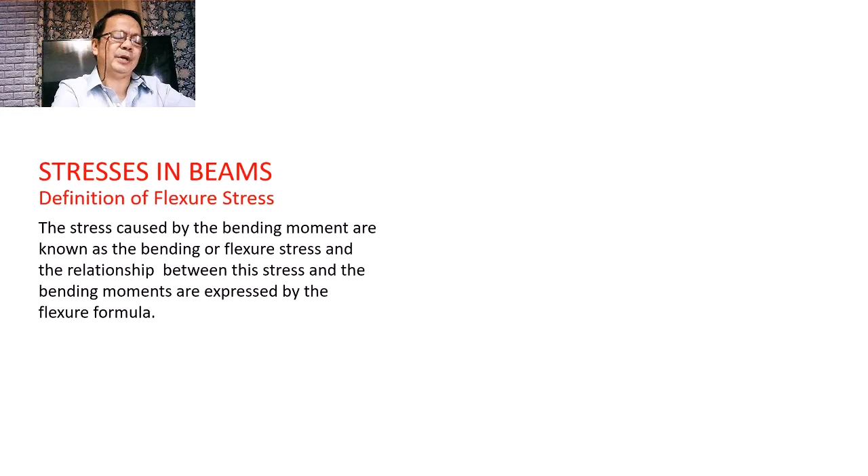Pag sinabi nating stresses in beams, these are the stresses that are caused by bending moments, sometimes also called flexure stress. The relationship between this stress and the bending moments is expressed in terms of the flexure formula. Ang ating magiging paraan ng discussions ngayon ay ipakita natin kung paano ang derivation ng stress formula, and from there we shall show an example of how to use the stress formula in dealing with beams that are subjected to bending moments. So let us have here our derivation of flexure formula.

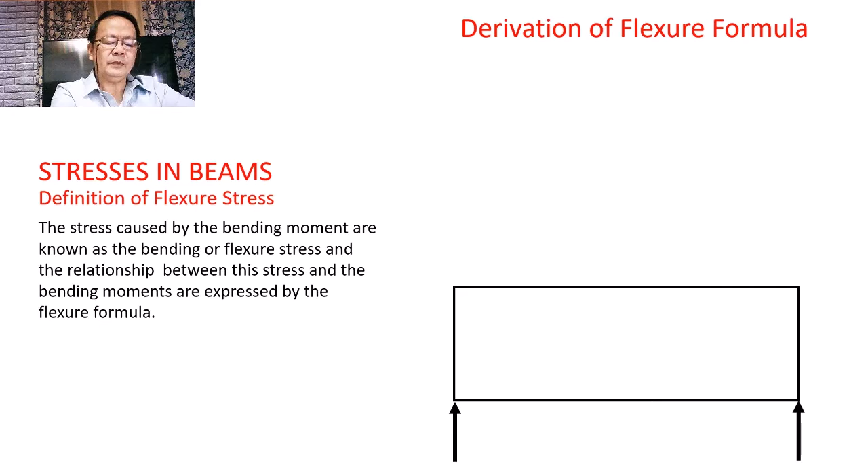Let's start with a simple beam that is simply supported or supported at the ends by a hinge and a roller. Imagine that on the beam we consider two adjacent sections AB and CD. The two sections are very close to each other, and the distance that separates them shall be treated as dx. Imagine that this beam is subjected to a concentrated load P. Hence, due to this concentrated load P, the beam will be subjected to bending.

And most probably, with exaggeration, this is what will happen to the beam after it has been subjected to the bending load. So here is what will happen: the beam will concave in this manner. And because of this concavity, the beam will be subjected to what we call flexure stress.

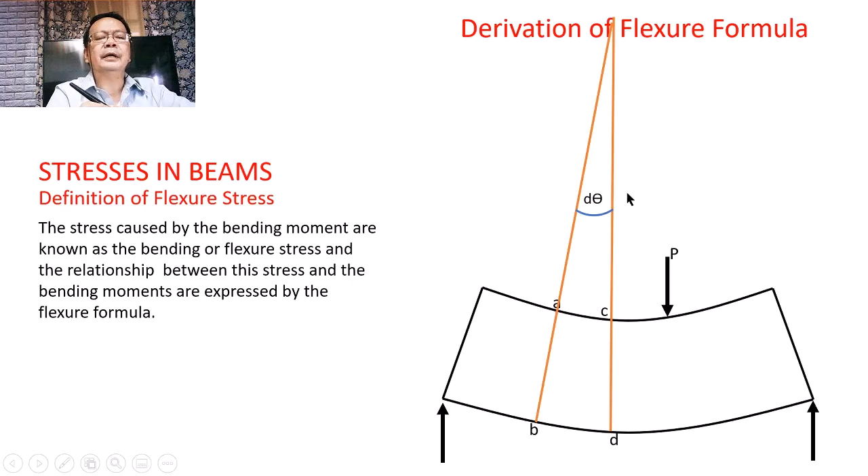Mapapansin natin that after the beam has concaved, the section AB and section CD rotated with respect to each other by an angle that is very small. We consider this angle to be d theta. Due to the rotation of AB and CD with respect to each other, the following can be observed.

The fiber AC on top of the beam is shortened. There is shortening on AC, and by the principle that we have learned, we will expect that this fiber is subjected to compression. While this fiber at the bottom of the beam, BD, is lengthened, and therefore we would expect that BD is subjected to tension because of the elongation of the fiber.

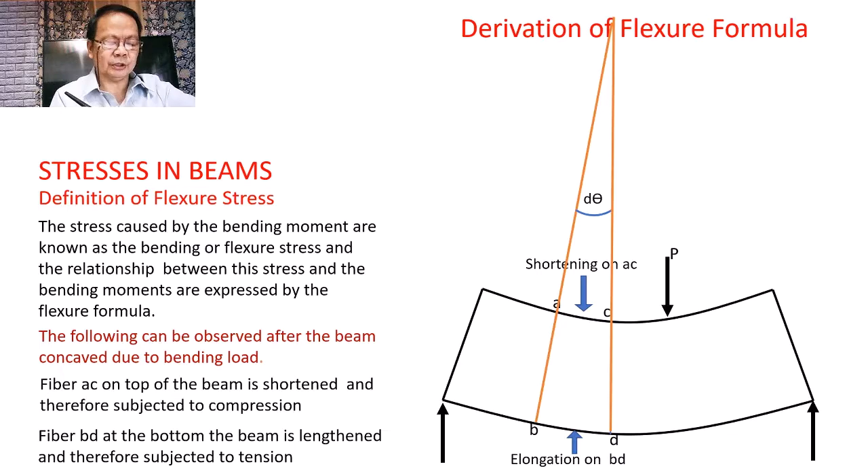And you will find that somewhere between AC and BD, there is a fiber EF. That is not changed in dimension - the dimension remains unchanged, and therefore we would expect that EF is not subjected to stress, or stress in that particular fiber is equal to 0.

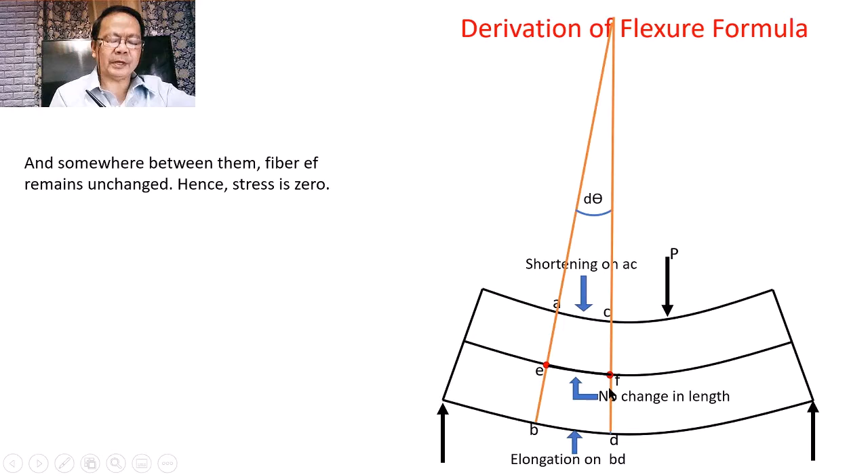And the section that contains this fiber EF that remains unchanged is what we call the neutral surface of the beam. We call this the neutral surface because such surface contains the fibers that are unchanged, and therefore they carry no load. This neutral surface is the dividing section of the beam, so that the upper portion of the beam is either subjected to tension or compression, while the lower portion of the beam is subjected to the opposite.

Stress, and from which the radius of curvature is also measured, and normally the radius of curvature is given by the symbol rho.

Now, if you are to draw line C prime D prime, which is parallel to AB - here is our AB, and imagine that we will be drawing a line that is parallel to this AB passing through F - you will find the following.

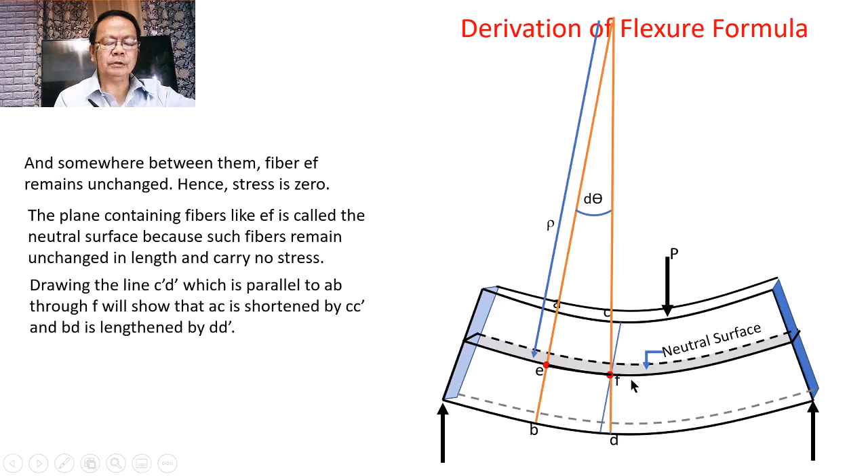If this will be the line that will be drawn, and imagine that this is our C prime D prime, we will see that this fiber AC is shortened by the amount C prime C, while the fiber BD is elongated by an amount D prime D. And the angle that this C prime D prime is making with respect to CD is also the same as the angle of rotation between AB and CD - that angle will also be this angle, d theta.

Now, let us imagine that we consider a typical fiber GH somewhere at a distance y from the neutral surface. Then we would expect that this fiber GH will have a deformation HK, the one shown in blue. And this deformation HK can be expressed by the relation between its position from the neutral surface, y, and the angle d theta that is subtended by that deformation.

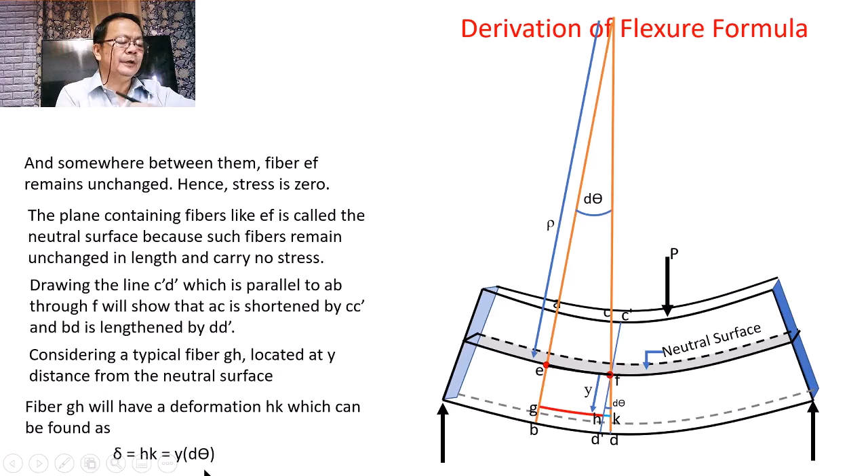This arc length HK, which is the deformation of the fiber GH, shall be equal to the product of y multiplied by d theta, where d theta is expressed in radians.

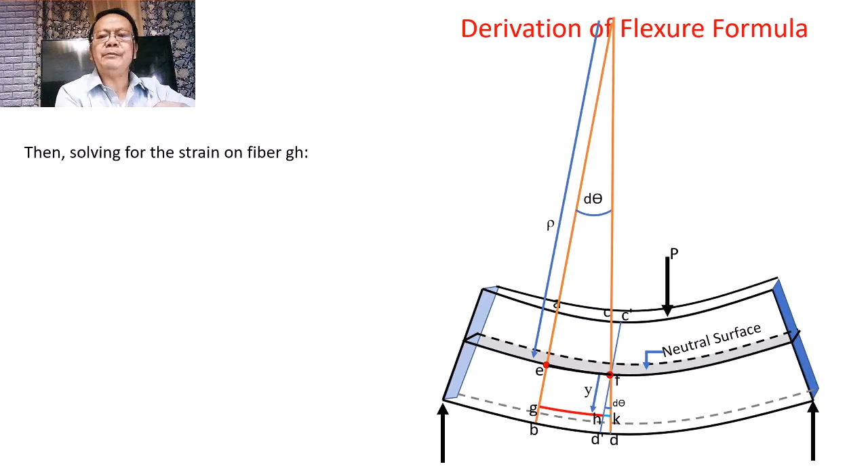Now we're to solve for the strain on the fiber GH. The strain being defined as the ratio of the deformation to the original length. Having shown that deformation is equal to the product of y multiplied by d theta for this fiber GH, therefore the strain shall be equal to the product of y multiplied by d theta divided by GH.

But GH is equal to EF, as shown in this illustration. EF is equal to, or can be computed as, the arc length that subtends an angle d theta on a radius equal to rho. Therefore EF will be equal to rho multiplied by d theta.

So if rho multiplied by d theta is substituted for GH in this strain formula, our strain will be equal to the ratio of the deformation over the original length, equal to y multiplied by d theta over rho multiplied by d theta. The d theta terms cancel each other, and what remains is the strain equal to the ratio of the distance y over the radius of curvature rho.

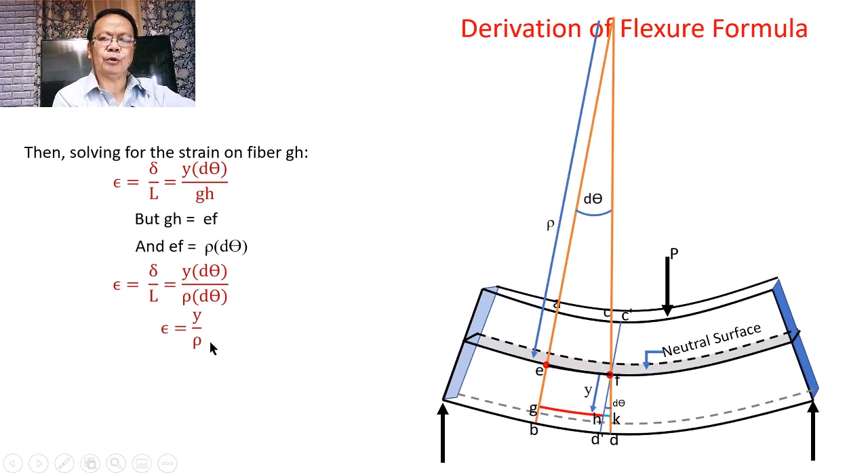Now if the beam is assumed to be homogeneous and obeys Hooke's law, which says that within the proportional limit the stress is directly proportional to the strain, therefore we would say that the stress shall be equal to the product of the proportionality constant, which is the modulus of elasticity, multiplied by strain.

And if strain is substituted with its value equal to y over rho, therefore the formula for stress will become equal to E multiplied by the quantity y over rho.

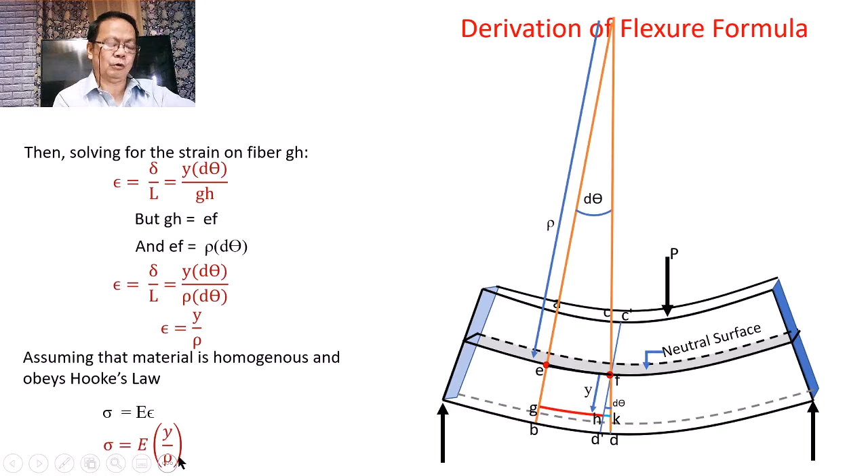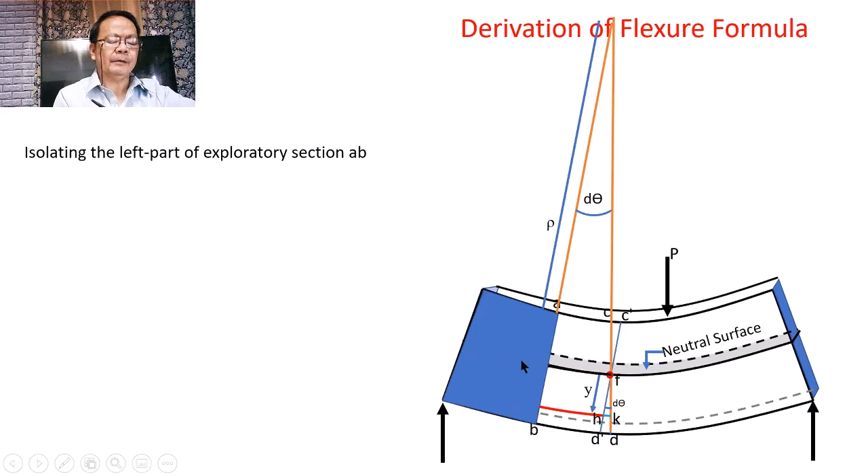Now let us consider isolating the left part of the exploratory section AB. Here is our AB, and let us imagine that this part, which I have given emphasis or marked, shall be isolated as a free body diagram. Let us try to isolate it here, and here is our isolated view of the segment, the left part of the exploratory section AB.

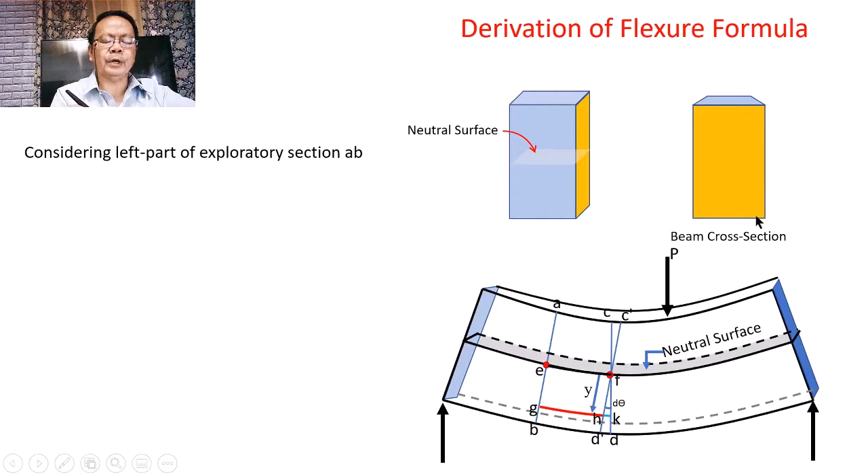Here is our neutral surface, and this part shall be our beam cross-section representing this side. Imagine that the beam cross-section is drawn here, so we have our beam cross-section, and its width will be equal to this width. The intersection of the neutral surface and the cross-section of the beam shall be called the neutral axis. In this section view, the neutral axis is the line drawn horizontally in this direction.

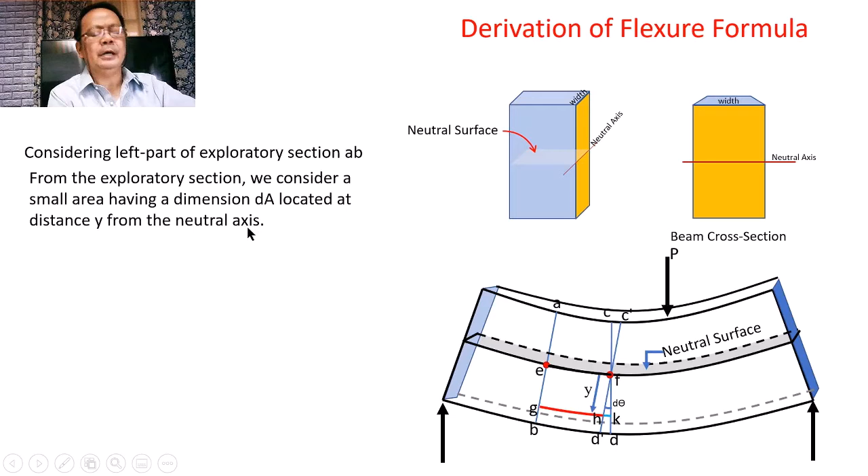Now let us imagine that on this isolated view of the beam, we consider a differential area dA, a small area having a dimension dA, located at a distance y from the neutral axis.

Because of the bending, as reflected by the elongation HK, we would expect that the lower portion of this beam is subjected to a tensile stress. Hence this differential area will be subjected to a differential force dF, which is very, very small, as it is acting over a very, very small differential area. The magnitude of this differential force will be equal to the product of the stress multiplied by that differential area.

So if we consider the moment resistance, or moment capacity, of this differential area, it will be equal to the product of y multiplied by that differential force. From here, we can find the resisting moment about the neutral axis of that differential area, located at distance y from the neutral axis, being subjected to a differential force dF, whose magnitude is equal to stress multiplied by the differential area.

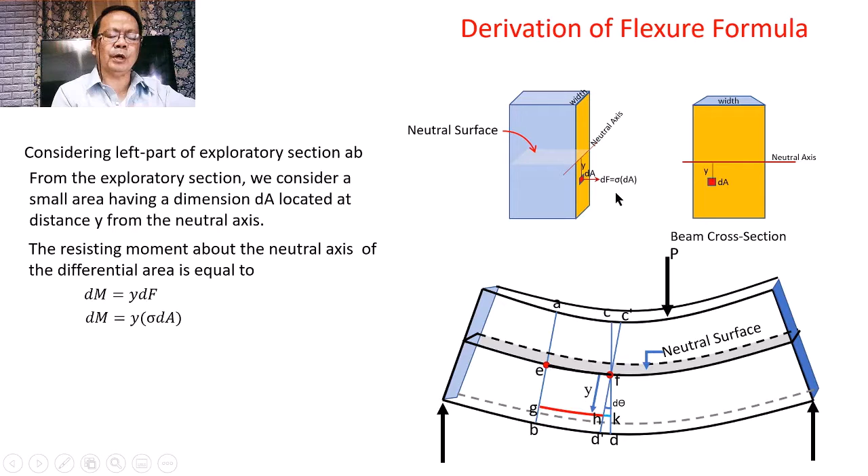This would offer a resisting moment equal to the product of y multiplied by that differential force, and that resisting moment is also very, very small, because the area is so small. But if we substitute the value of the differential force, which is equal to the stress multiplied by dA, into this formula, our dM shall be equal to y multiplied by the stress multiplied by dA.

Now, if we are to consider the total resistance of the entire section, the total resisting moment about the neutral axis of the entire area must be equal to the total moment acting at that section, and is the sum of the resisting moments of each differential area. Adding all the differential moments that each differential area can offer gives the total resisting moment of the entire area, which in design must equal the actual bending moment acting at that section.

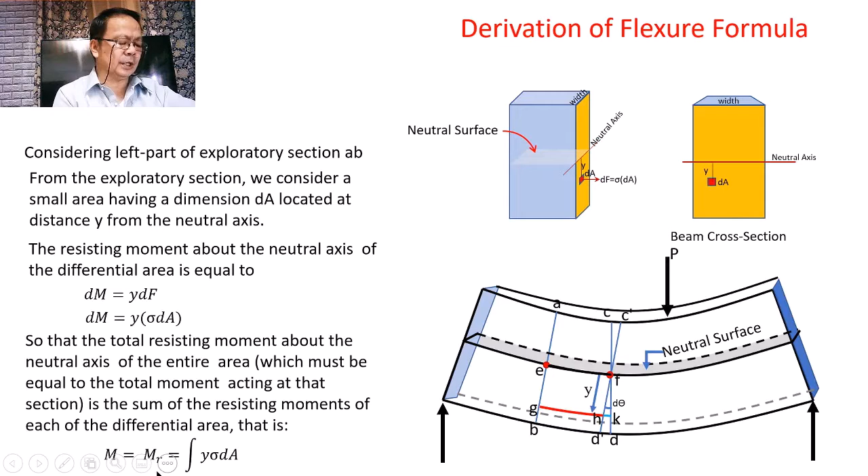Hence, we say that the moment, which is equal to the resisting moment, is equal to the integral of y multiplied by the stress multiplied by the differential area.

However, a while ago we expressed that this stress is equal to the modulus of elasticity multiplied by the strain. If strain is substituted by y over rho, then stress equals E multiplied by y over rho.

Now, if this stress is substituted in this formula, the moment becomes the integral of y multiplied by the quantity E multiplied by y over rho, multiplied by dA. Rearranging and placing the constants E and rho out of the integral sign, the moment becomes E over rho multiplied by the integral of y squared multiplied by dA.

I would like you to take a look at this term. The term represented by the integral of y squared dA represents the moment of inertia of the section of the beam with respect to the neutral axis, normally denoted with the symbol I.

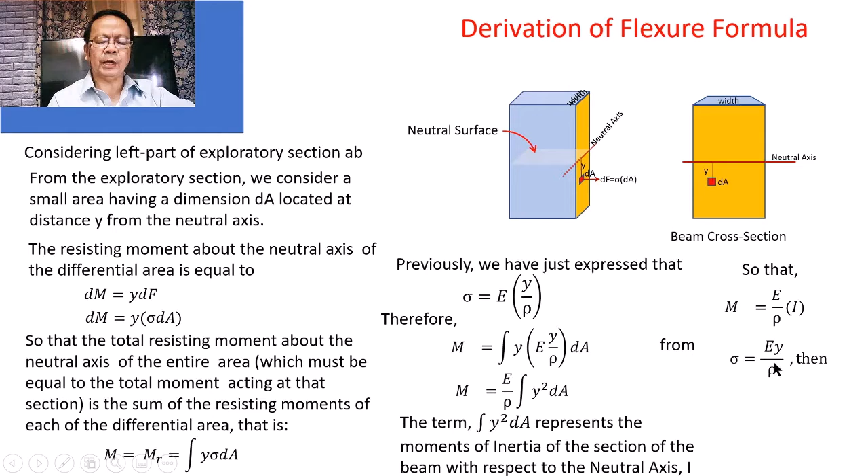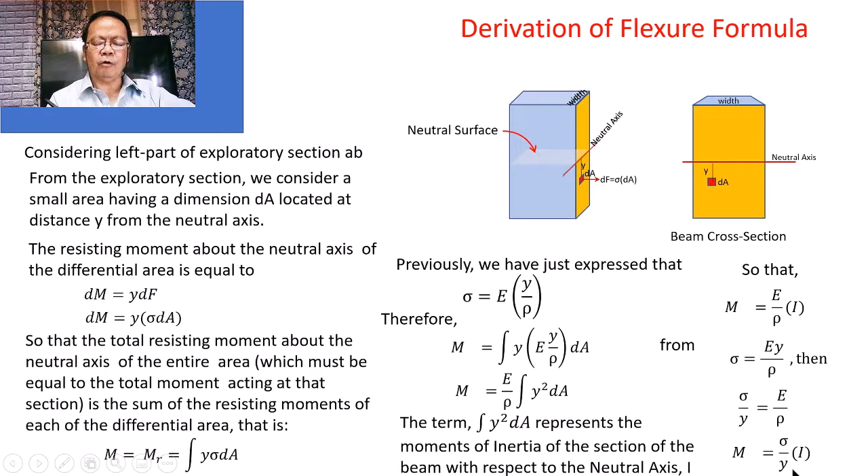But a while ago we showed that stress is equal to the product of E multiplied by y over rho. If this equation is divided by y, we get stress over y equal to E over rho. Now, substituting this E over rho, which equals stress over y, into the formula, our moment becomes equal to stress over y multiplied by I.

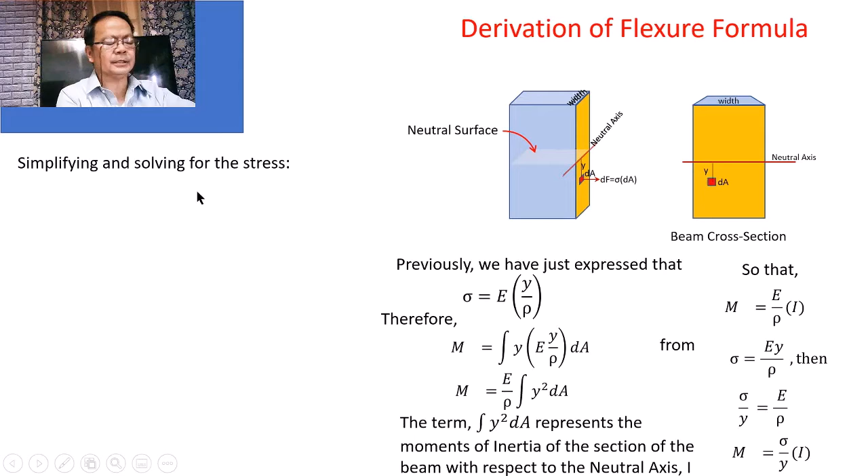If this is rearranged, simplified, and solved for the stress, we get stress equal to My over I. This is the relationship that shows the formula relating the stress, the bending moment, and the location of the fiber where the stress is being computed.

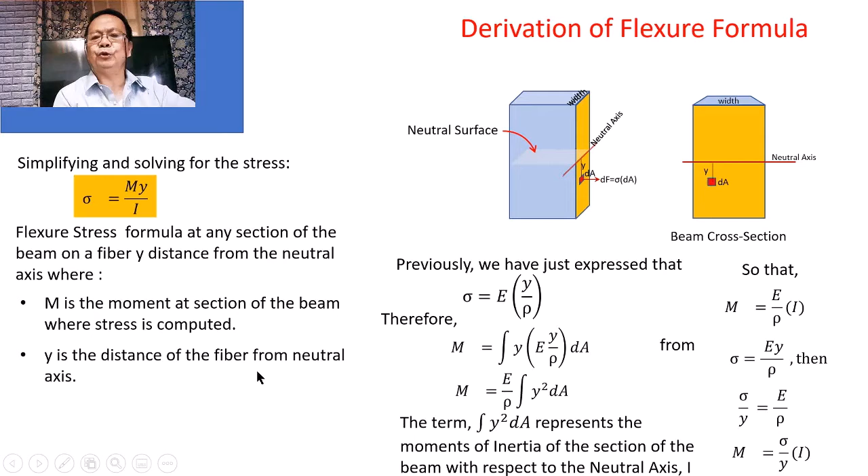From this stress formula, which we call the flexure formula, the stress at any section of the beam on a fiber located y distance from the neutral axis is given. Here, M is the moment at the section of the beam where the stress is computed, y is the distance of the fiber from the neutral axis of the beam cross-section, and I is the moment of inertia of the beam cross-section with respect to the neutral axis.

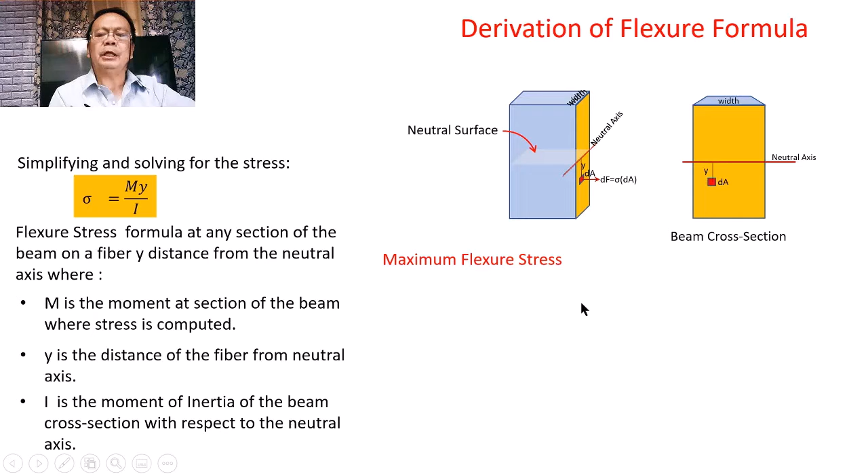Now, for the maximum flexure stress, we say that the maximum flexure stress on a beam occurs at the section where the moment is maximum and at the fiber farthest from the neutral axis. Meaning, we can expect the maximum stress to occur at the section of the beam where the moment is maximum and at the position farthest from the neutral axis of the beam.

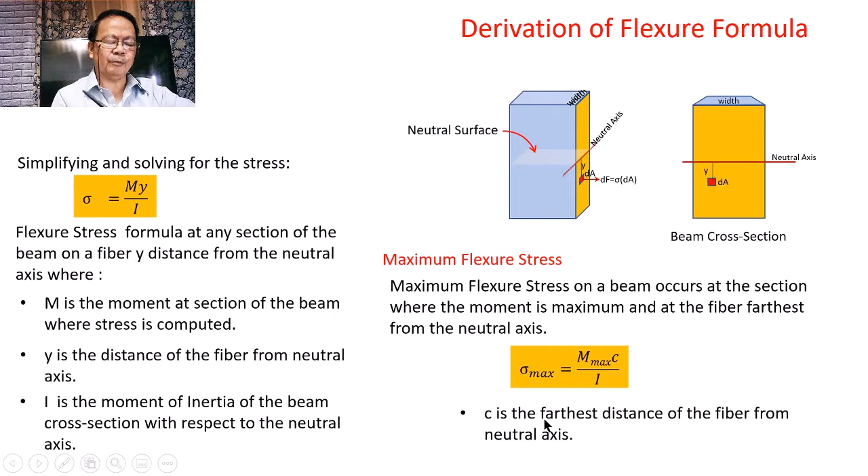Hence, for the formula for the maximum flexure stress, substituting the maximum moment for M and c for the maximum value of y, the stress can be written as Mc over I, where c is the farthest distance of the fiber from the neutral axis.

Now let us consider a beam that is rectangular in cross-section, having a width equal to b and a depth equal to d. So we shall have here our beam cross-section, with the width here and the depth defined by this distance. The neutral axis of the beam is located at distance d over 2 from the top, or d over 2 from the bottom.

For this rectangular beam cross-section, the moment of inertia of the beam with respect to the neutral axis is equal to bd cubed over 12. If this is substituted into the stress formula, we can find the maximum stress of the rectangular beam to be the maximum moment multiplied by c, which is equal to d over 2, divided by the moment of inertia, bd cubed over 12.

In this relationship, d will cancel, and 2 will cancel with 12, becoming 6. So we shall have the stress formula for the maximum stress in a rectangular beam equal to 6M over bd squared. That gives us our stress formula.

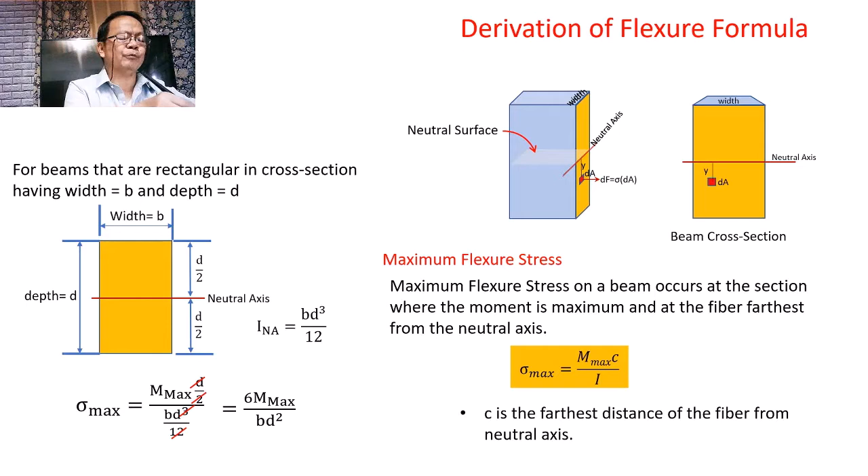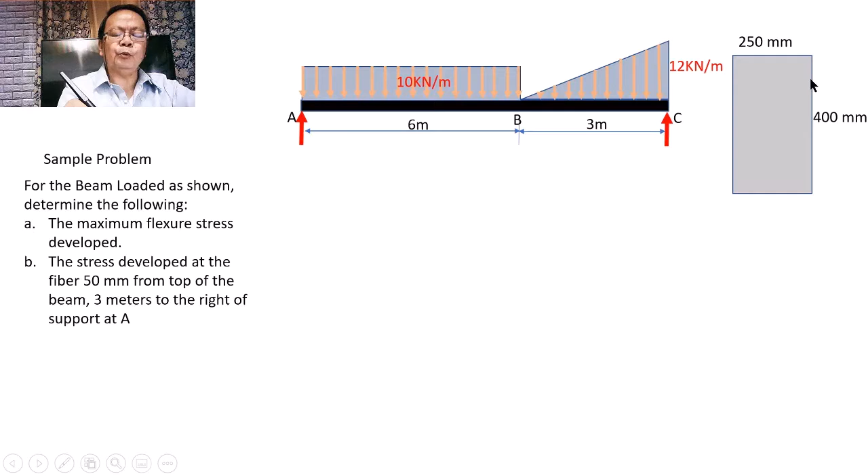We are asked to solve for the maximum flexure stress and the stress developed at the section 3 meters to the right of the support, 50 millimeters from top, meaning we are finding the moment at this particular section of the beam, 3 meters along and at a certain distance of 50 millimeters from the top. So how do we solve this problem?

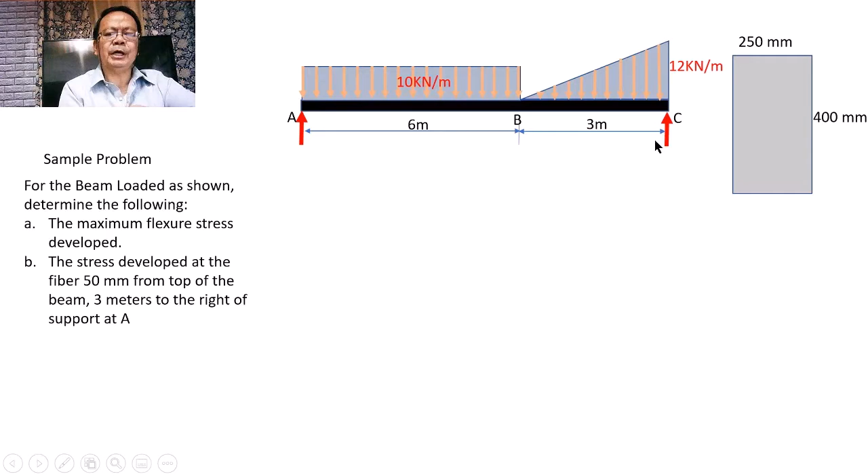Since we are looking for the maximum stress, we need to find the maximum bending moment. It is good to first solve for the magnitude of the reactions at the supports, and from there draw the shear and moment diagrams. Let's start with solving for the reactions at the support.

We can start by solving for the reaction at A by taking moments at C. When we sum up moments at C equal to 0, considering counterclockwise moment as positive, we can solve for A.

Because the beam is subjected to a uniformly distributed load and a uniformly varying load, we need to identify the magnitude of those distributed loads. For the uniformly varying load, the resultant of this triangular loading is located at a point with magnitude equal to 1/2 of 3 multiplied by 12, acting at a distance of 1 meter from the right support.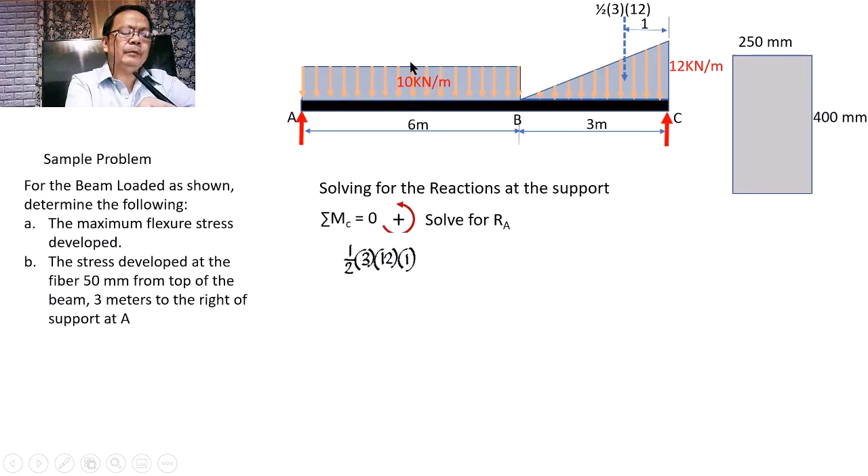From here we apply our moment equation: 1/2 of 3 multiplied by 12 multiplied by 1, as the moment at C, while the other load has a resultant equal to 10 multiplied by 6, with a distance from the right support equal to 6. Adding these, plus 6 multiplied by 6, minus RA multiplied by 9, equals 0. From here we can solve for RA equal to 42.

After solving for RA, we can solve for R sub C by summing moments about RA. When we sum up moments about RA equal to 0, considering the same direction convention, clockwise and counterclockwise as positive, we can solve for R sub C.

We solve for the counterclockwise moment due to R sub C, giving R sub C multiplied by 9. The resultant of this rectangular load has a distance of 3 from A, so we have minus 10 multiplied by 6 multiplied by 3.

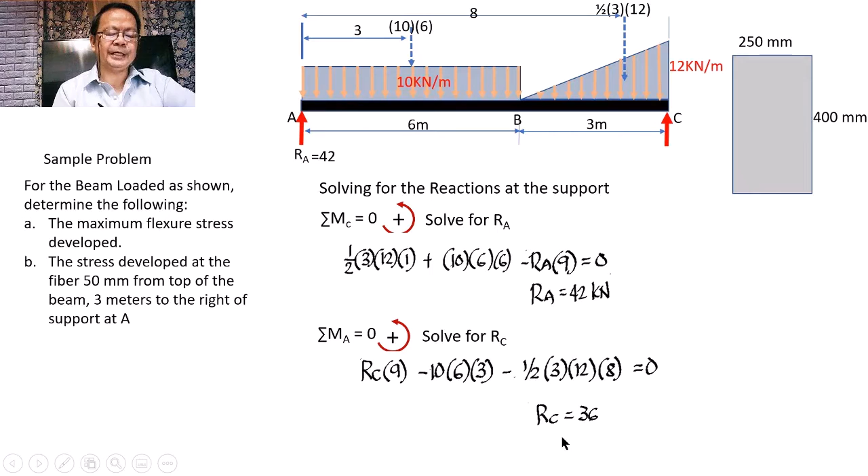This other load has a moment arm of 8 from A, giving us minus 1/2 of 3 multiplied by 12 multiplied by 8, equal to 0. From here we can solve for R sub C equal to 36.

After solving for the reactions at the supports, we can now draw the shear and moment diagrams. Let's start with the shear diagram, finding the shear at every change of load position, at points A, B, and C.

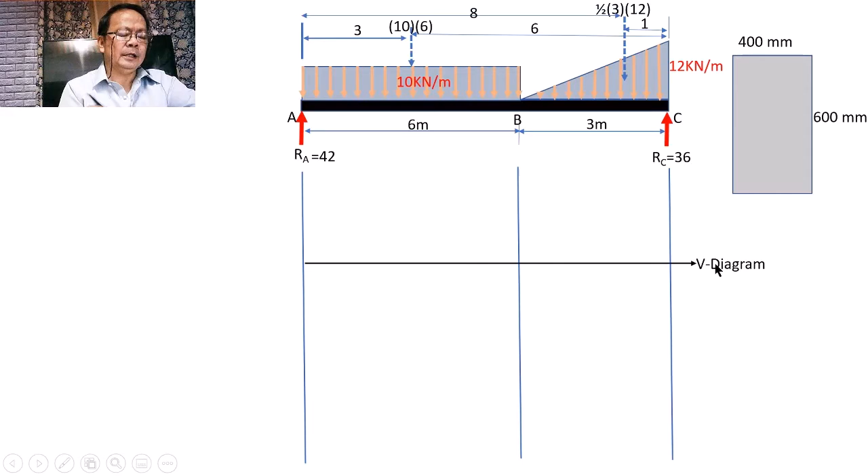Let us consider our controlling points A, B, and C. If we are to solve for the shear by this relation, we would expect that the shear at the left of A shall start at 0.

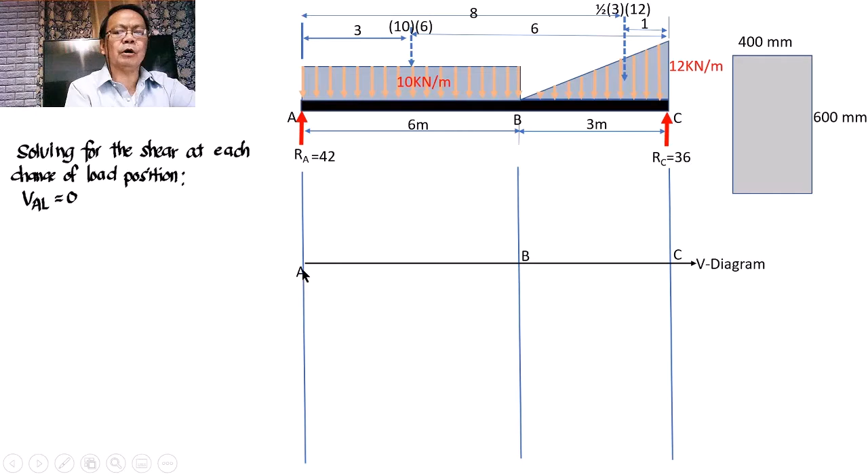So we have here 0. Therefore, the shear at the right of A will be equal to this concentrated load plus the concentrated load at A, which is equal to 42. So when this is substituted, we have 0 plus 42. Therefore, the shear at the right of A will be equal to 42. And this 42 will be somewhere here.

Therefore, this will be connected by a line that is directed upward, representing this concentrated load upward at A. Then next we have to compute for the shear at B.

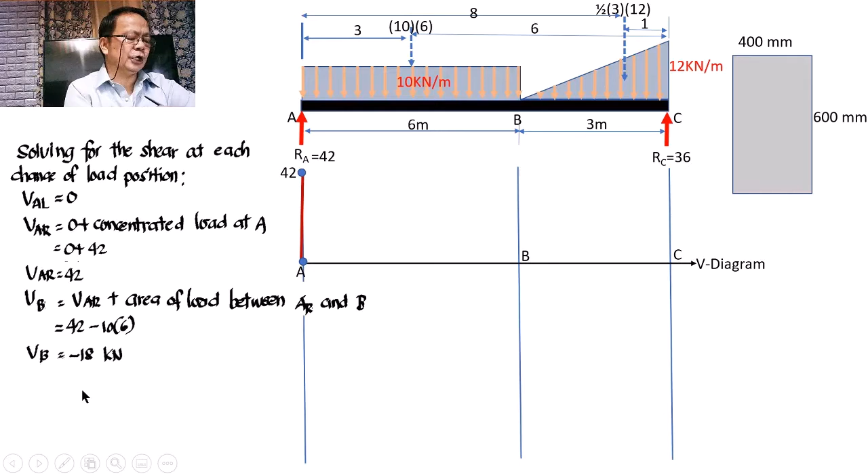The shear at B will be the shear at the right of A plus the area of the load between the right of A and point B. In the illustration, the load between A right and B is a rectangle having a magnitude of 10 multiplied by 6. Therefore, if this is substituted, we have 42 minus 10 multiplied by 6, and the shear at B will be negative 18.

And negative 18 could be somewhere here. This will now be connected by a straight line because we have a horizontal load representing degree equal to 0. Since the degree of curvature of the shear diagram is always 1 degree higher than the degree of curvature of the load diagram, we expect that the shear diagram between A and B would have a degree equal to 1, which represents a straight line. Therefore, 42 and negative 18 here can now be connected with a straight line that runs in this direction.

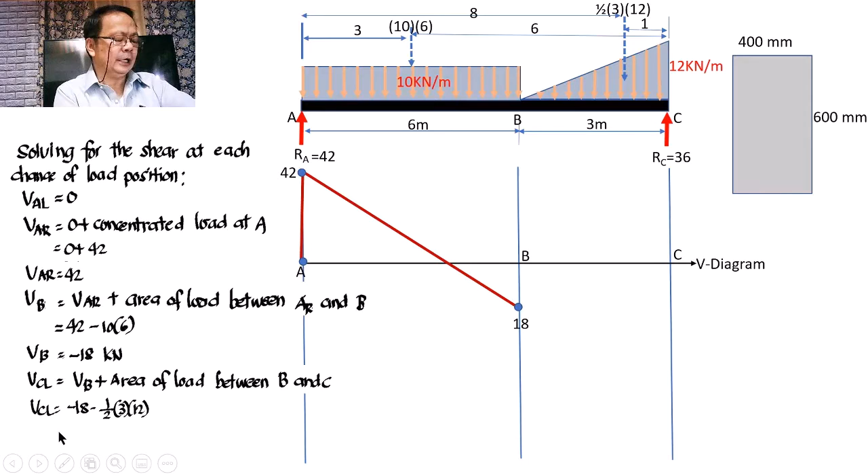Then afterwards, we can now compute for the shear at the left of C. The shear at the left of C will be equal to the shear at B plus the area of the load between B and C. The area of the load between B and C is triangular, having a base of 3 and a height equal to 12. So if this is substituted here, the shear at the left of C will be negative 18 minus 1/2 of 3 multiplied by 12, and this gives us a value of negative 36.

So somewhere here we have a value of negative 36, and we can connect the two points, negative 18 and negative 36, with a curve that is a second degree curve because the load is uniformly varying, representing a first degree curve. Therefore, it will be connected with a second degree curve that runs in this direction.

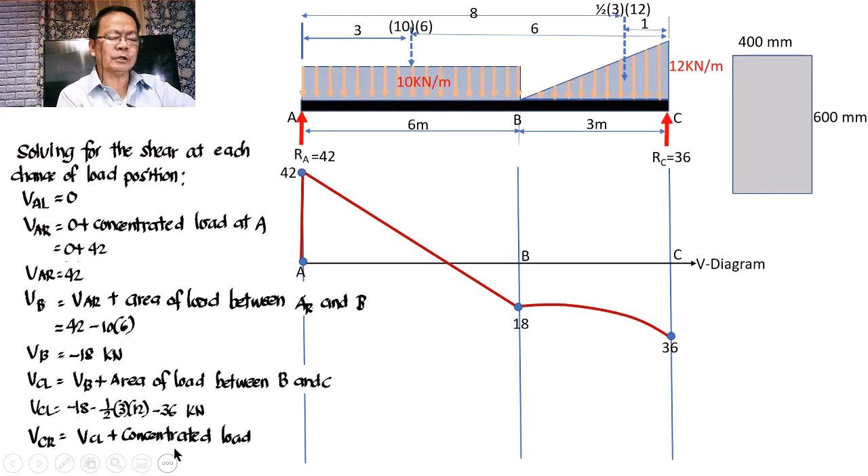And therefore, finally, the shear at the right of C will be equal to the shear at the left of C plus the concentrated load at C, and that gives us a value equal to 0. And this now becomes our shape of the shear diagram.

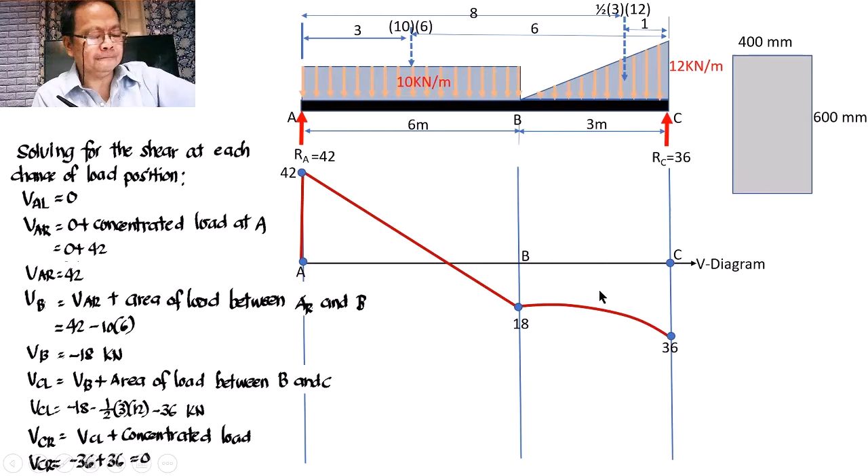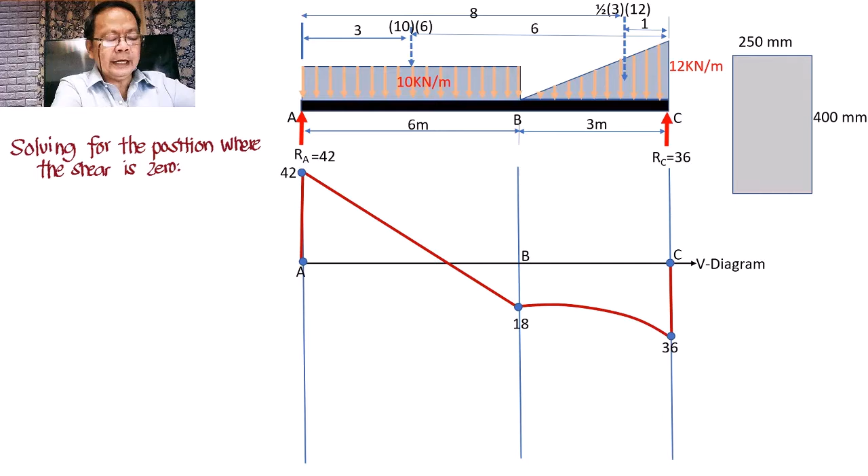Now, after we have drawn the shape of the shear diagram, we can now compute for the position where the shear is 0, because we expect that the moment will be maximum at the point where the shear is 0. And we will notice on the diagram that we have seen this point where the shear is 0. Therefore, we have to consider where this position is, either from A or from B.

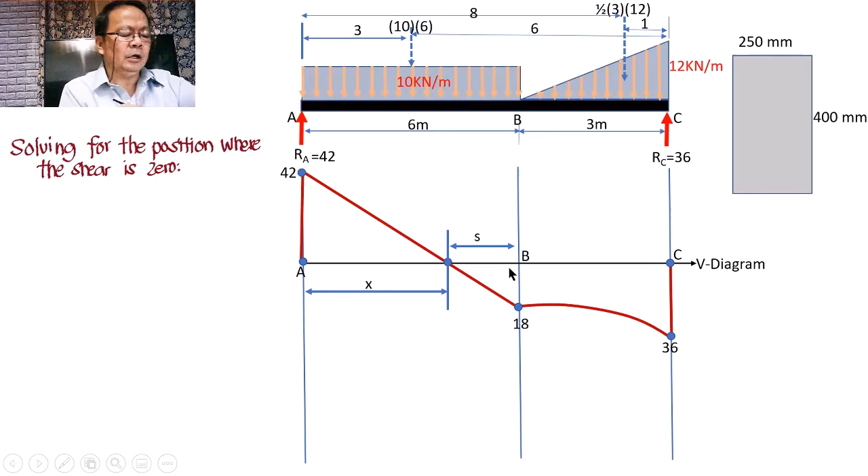Let us imagine that this distance be measured as x from A, or s from B. Therefore, you would find that there will be two similar triangles. So from the similar triangles, we can solve for s and x by using ratio and proportion. So using ratio and proportion, how do we express the ratio and proportion?

I will have here 42 is to x, the vertical is to the horizontal, as 18 is to s. But we expect that we are going to look at the relationship between x and s, because the sum of the two is equal to 6, therefore s will be equal to 6 minus x. And if this s that is equal to 6 minus x is substituted here, then we can find that 42 over x is equal to 18 over 6 minus x.

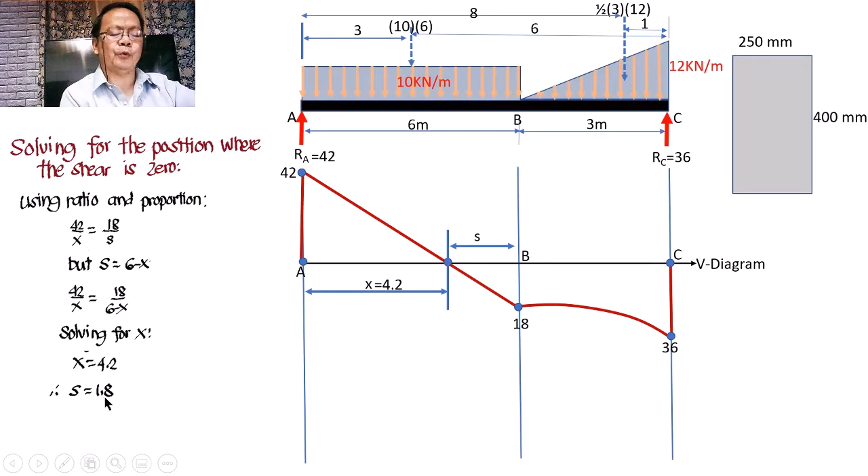And so from here we can solve for x, and we find that x is equal to 4.2. With x equal to 4.2, then s will be equal to 1.8. And so you can find that this one will be equal to 1.8.

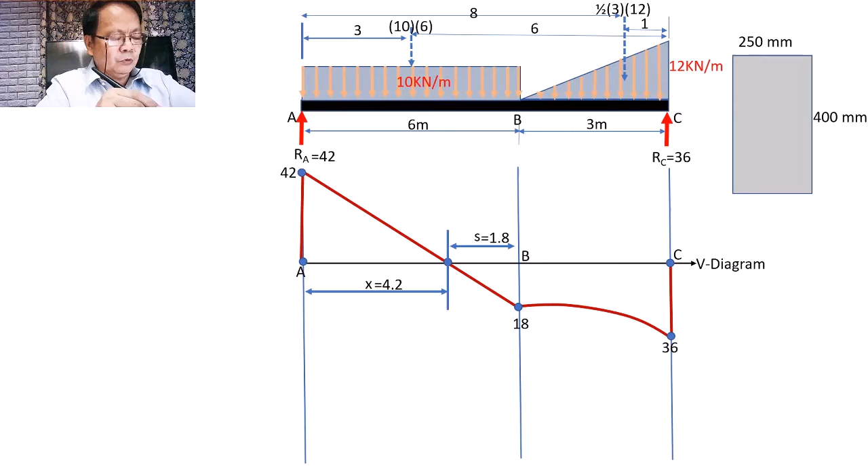Let us now draw the moment diagram from the shear diagram we computed. In drawing the moment diagram, let us give emphasis to the magnitude of the maximum value and the moment at the section 3 meters to the right of A, because these are the moments we will be using in solving the questions. For part 1, we shall work on the maximum stress, so we need the maximum value of the moment.

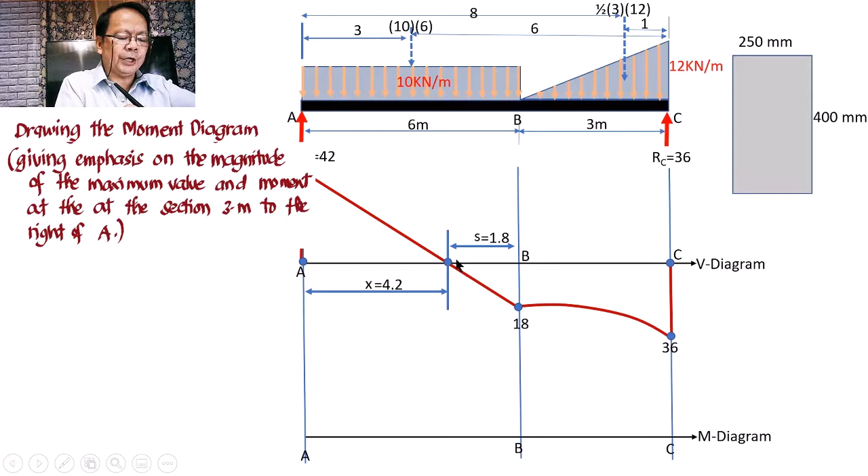While for the second part, we are considering the stress at a particular section, 3 meters to the right of A, so we shall solve for the moment at that section. Let us now start our moment diagram here. Let us consider the change of load positions at points A, B, and C, and since we have an additional point, let us call it D. On the moment diagram, it's important to consider these points in the computation.

So our moment at A will be 0. We consider this as our moment at A.

The next point we shall work on is the moment at point D. The moment at D will be equal to the moment at A plus the area of the shear diagram from A to D. This area is in the form of a triangle having a base equal to 4.2 and a height equal to 42. Therefore, the moment at D will be 0 plus one half of 4.2 times 42, giving us a value of 88.2 kilonewton meter, which we plot here.

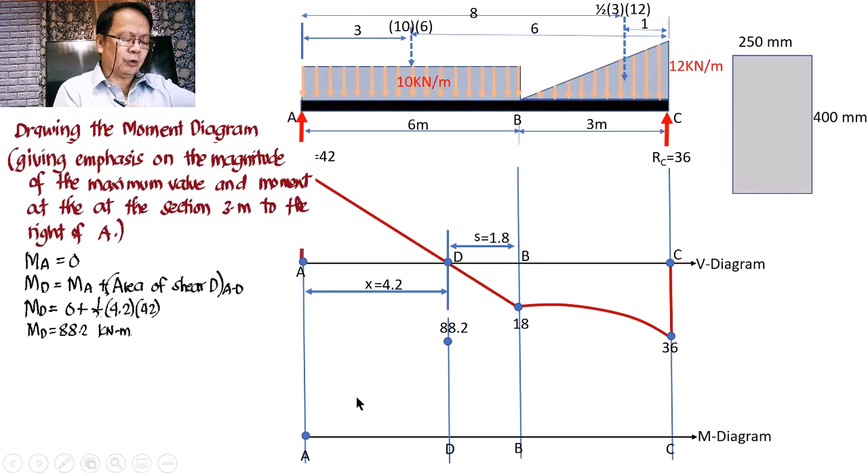How are we going to draw the curve connecting point A and this point on the moment diagram? Since the degree of curvature of the shear diagram is 1, we expect this to be a second degree curvature with a slope of 0 at this point, so it will be concave downward.

The next point is the moment at point B, which equals the moment at D plus the area of the shear diagram between D and B. Here we have a triangular area with base 1.8 and height 18. So the moment at B equals 88.2 minus one half of 1.8 times 18, giving a value of 72 kilonewton meter, plotted here.

How do we connect these two points? Again with a second degree curvature. Since the slope here is 0, we expect the slope at 88.2 to also be 0, making this curvature concave downward as well.

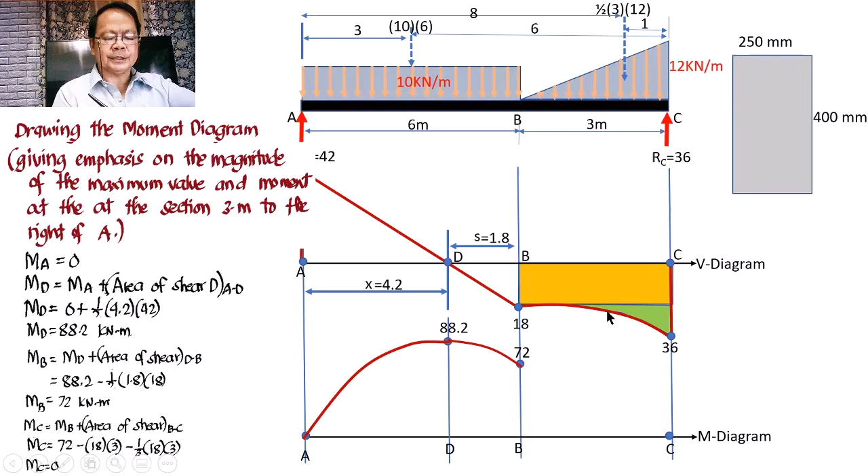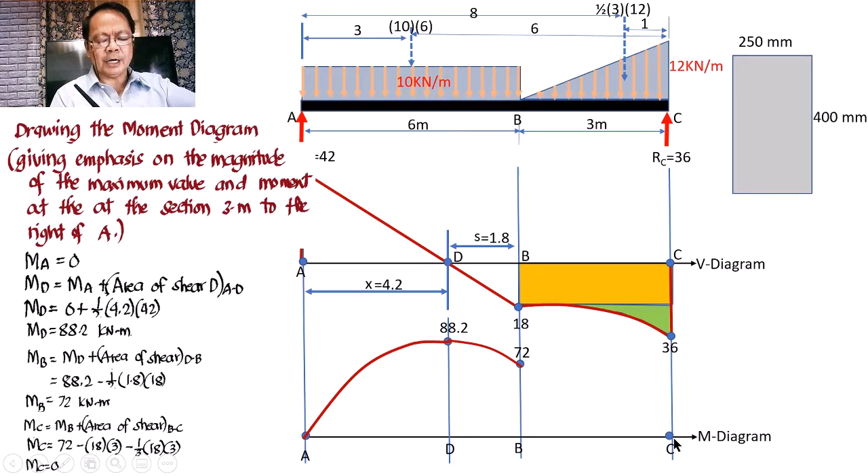So our moment here will be equal to 0. When we connect this, it will be drawn with a third degree curvature, since our shear diagram is a second degree curve. We expect the slope at 72 to be smaller than the slope at C, so it will also be concave downward, running in this manner.

After we have computed the moment diagram, you will notice that the maximum moment is at point D, having a magnitude of 88.2.

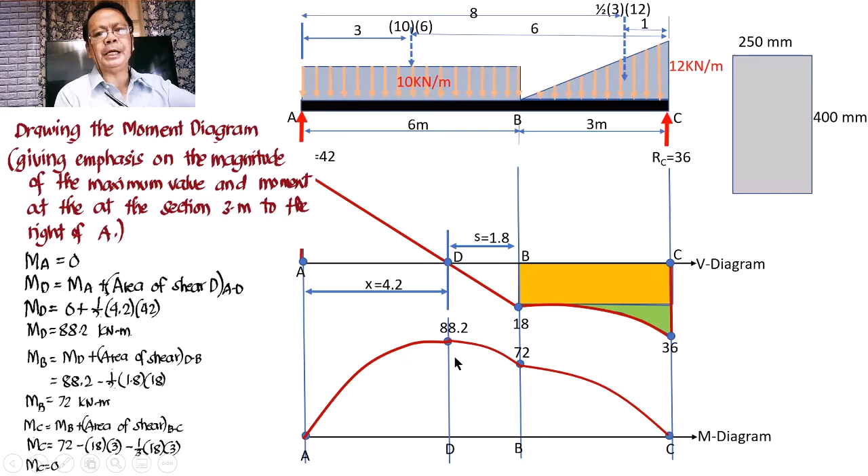From here, we can already solve for the first question, which is to solve for the maximum flexural or bending stress.

We're given that the maximum flexure stress is computed as Mc over I. Because we have a rectangular cross section, this can be simplified to 6M max over BD square. Take note, this is only applicable for a rectangular section. So we shall have the stress equal to 6 multiplied by 88.2 kilonewton meter divided by

250, divided by 400 square. Because we have different units, we can convert the kilonewton meter into newton millimeter by multiplying by 10 to the 6, since 10 to the 6 newton millimeter is equivalent to kilonewton meter. So the kilonewton meter will cancel, and the millimeter will also cancel. What remains is a unit of newton per square millimeter, which is equivalent to megapascal. This has a value of 13.23 megapascal.

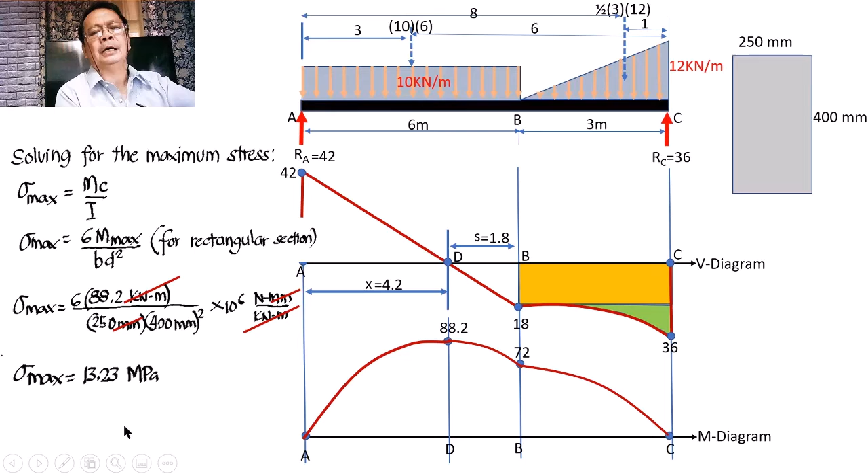So this becomes the maximum stress, acting at this section of the beam, 4.2 meters to the right of A, and at the top or at the bottom of the beam.

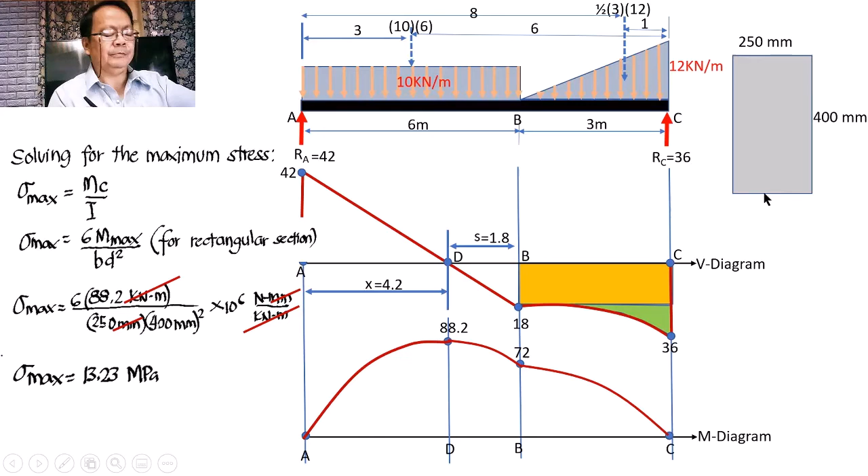After that, we can now compute for the second question, which is to find the stress at the section 3 meters to the right of A, and 50 millimeters from the top of the beam.

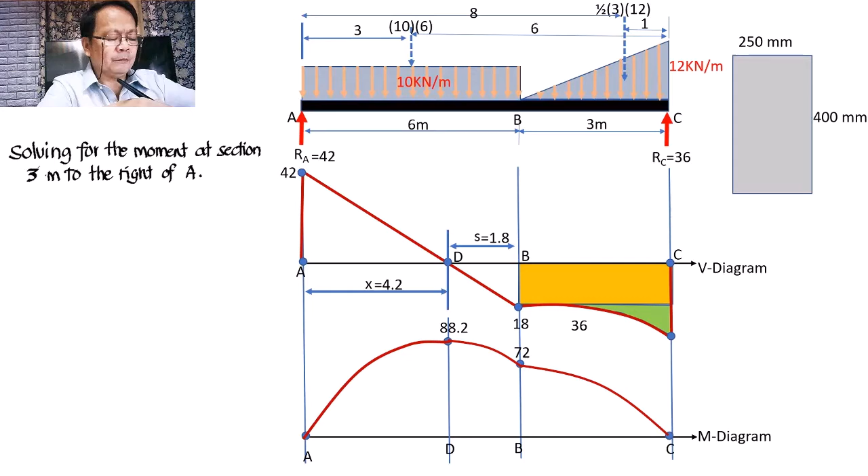We shall solve for the moment at the section 3 meters to the right of A. There are several ways of computing this moment. Maybe we can compute the moment at this point, because when you say 3 meters, it will be the moment at this point. However, we can also consider going back to the original loading condition, since the moment we're talking about is actually at this section of the beam.

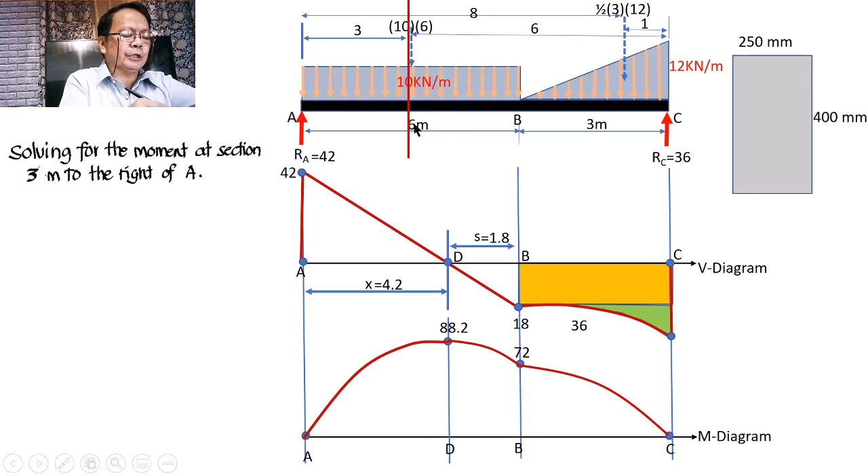3 meters to the right of A. If we consider this section and isolate the left part of the exploratory section, this is what we will have. We simply consider the moment at this section of the beam.

This part of the beam would have a total load equal to 3 multiplied by 10, acting over a distance of 1.5 from this exploratory section. Therefore, the moment at 3 meters will be equal to 42 multiplied by 3, minus 3 multiplied by 10 multiplied by 1.5, which gives us a value of 81 kilonewton meter. So this is now the moment at the section 3 meters to the right of A.

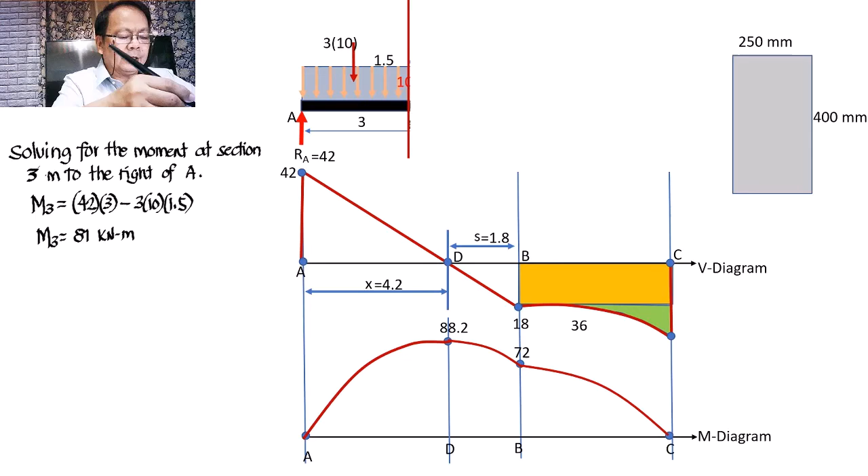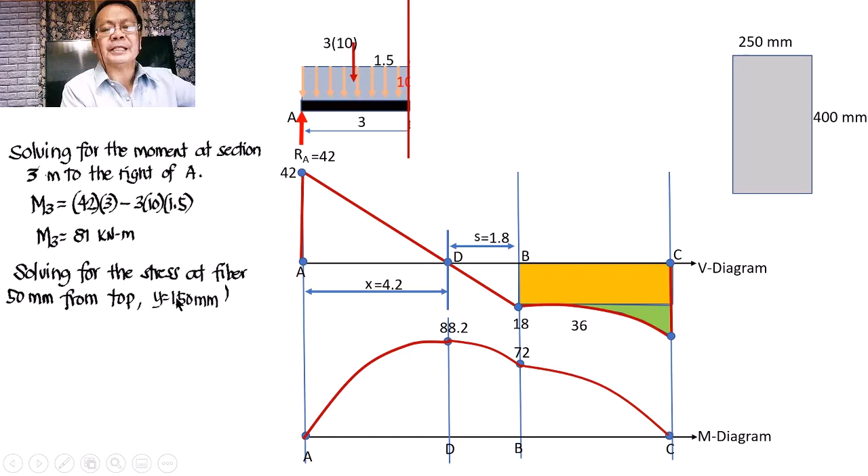Since we are looking for the moment at the section 3 meters to the right of A, at a fiber 50 millimeters from the top, we shall now solve for its stress. We are talking of the position of the fiber, which is located somewhere here.

Let us imagine that this is our neutral axis, and here is our fiber where we are computing the stress. The distance of that fiber from top is 50 millimeters, and since the depth of the beam is 400, the distance of that fiber from the neutral axis shall be equal to 150 millimeters.

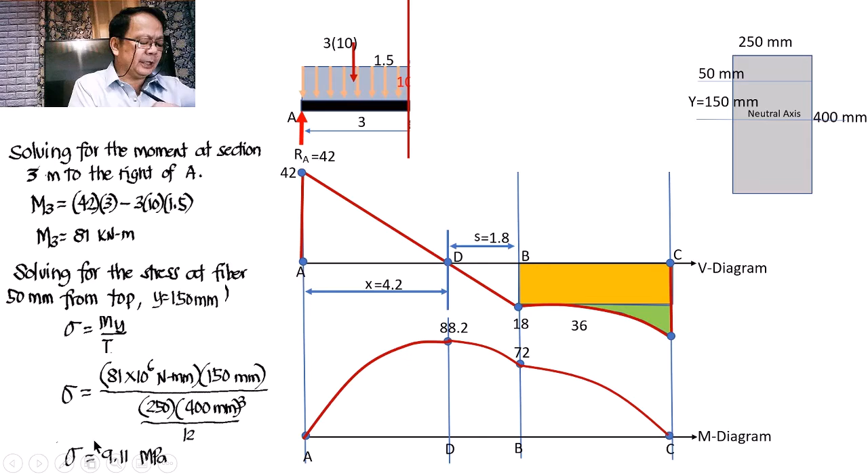Substituting these values into the formula for stress, My over I: the moment at that section is equal to 81 kilonewton meter, the distance of that fiber from the neutral axis is equal to 150 millimeter, and the moment of inertia is equal to 1 over 12 times b times d cubed. When this is simplified, we get a stress equal to 9.11 megapascal.

So guys, I hope you were able to follow our explanation on the stresses in beams, particularly the derivation of the formula and its application in solving for stress in beams subjected to bending moment.